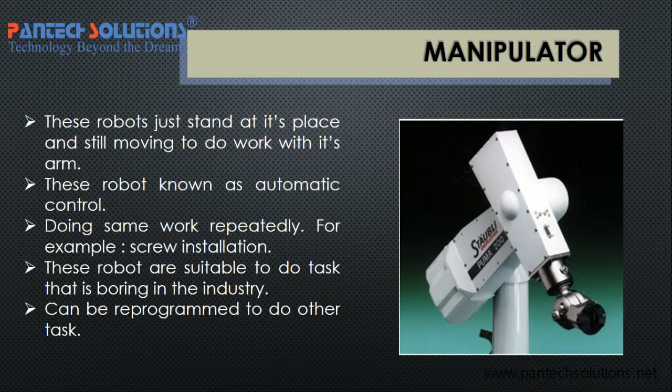Some examples of manipulator robots are forging robots, assembly installation, blocking rod for car park, and robotic arm. These can be said to be the major robotic applications, especially for manipulators.

Yeah, definitely it can be changed according to the user's task.

For example, here we have a number of applications, right? There are four applications: forging and assembly installation, blocking rod for car park, and robotic arm.

Among these, assembly installation is used for applications in car manufacturing or automobile industries. Blocking rod - whenever you go to a toll gate, a particular block is given automatically until you pay that amount. That is known as blocking rod.

Similarly, the robotic arm is very famous in DIY robots. This particular robot is used to lift and place, or to do applications similar to assembly installation, but its application can be changed as easily as possible.

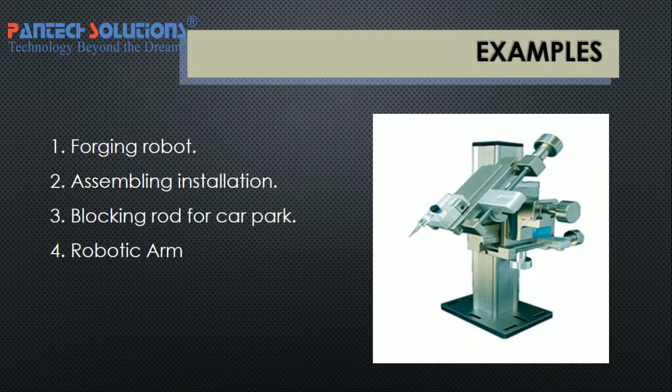Example of robotic arm. It is mostly used in industries just to lift heavy materials. This is also a standalone robot only. Let me show you this particular image. I hope you are able to see this particular image. So this is nothing but known as the robotic arm. That is robotic arm.

Okay, then let us move on towards mobile robots. Whenever you go towards mobile robots, it is completely used for just moving from one place to another place, such as legged robot or wheeled robot. Among these, wheeled robot is the most famous robot among these applications. This wheeled robot can be used in many household appliances like a vacuum cleaning robot with the help of remote control, either IR or RF.

Regarding a particular application, you will be able to just send the data, and after completing the cleaning sections, you can remove the dust bag from the robot, and it will also automatically go and sit within its particular place. Generally this kind of vacuum cleaning robot can be done with the help of lidar, IR sensors, and based on this tracking only it will be able to clean each and every place. It just does not look for the dust and all.

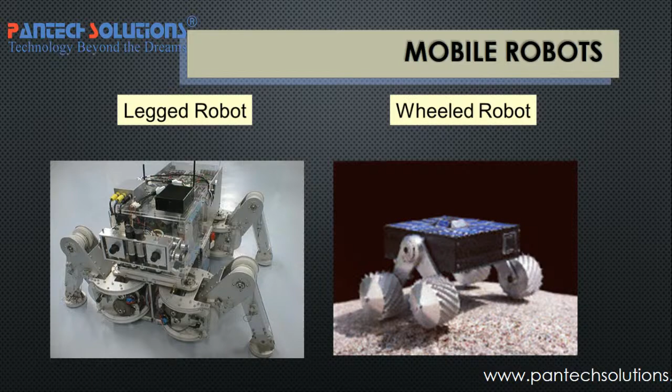So these are known as mobile robots, walking robots, and rolling robots. Whatever explanation was given is written in the form of points.

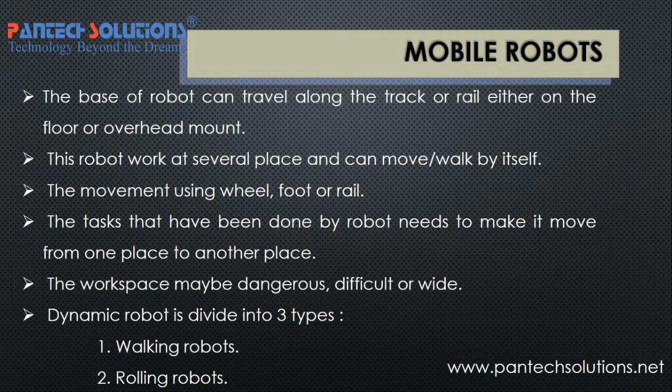So if we go for each and every robot, the components are manipulator, end effector, actuator, sensor, controller, processor, and software. The manipulator, end effector and these are mainly regarding the body structure, and according to the application or structure of the robot, it often changes.

This manipulator is known as the joining link of each and every part. The end effector changes according to the application, so each and every robot structure gets changed. For example, for laser painting or drilling robots, they will fix drilling motors or spray guns at the end, and similarly a welding robot will have a welding torch fixed at the end.

Actuators are the motors used to make the robot move in a swift manner, so it can be flexible on a 360-degree side and rotate in any way according to the requirement. Mostly they use stepper motors and servo motors only; DC motors are very rarely used for robotics.

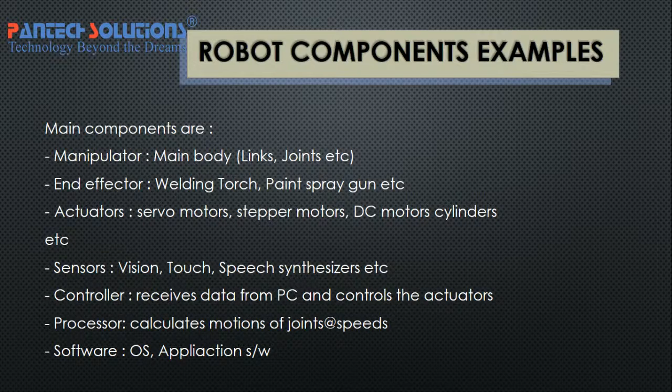So these are the most common sensors that can be used for a robot. Only the Mars rover robot sent to the Mars planet contains all these kinds of sensors, because it was sent to analyze the Mars environment. For that they require light, sound, heat, chemical, force, object proximity, physical orientation, magnetic and electric field, and resistance sensors.

No, DC motor and stepper motor are entirely different. The DC motor works only with the help of gears and coils, while the stepper motor works in a step by step angle manner. With this step by step angle, we can increase the speed, and at the same time acquire a heavy load.

If you compare the size of a DC motor and a stepper motor, both will be the same, but a DC motor won't be able to handle even 5 kilos of load, whereas a stepper motor and servo motor have the capacity to approach 5 kg, with a smaller size. Even power consumption is better compared to a DC motor.

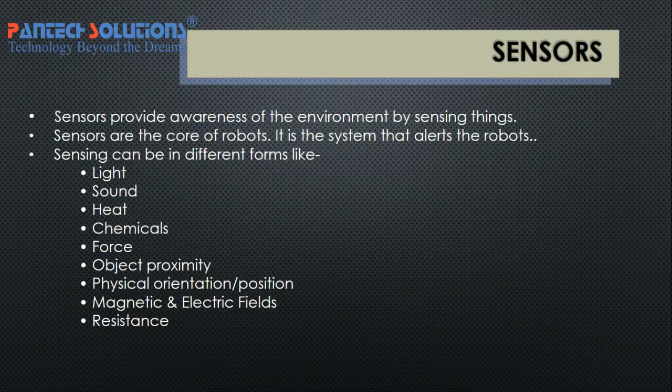So similarly, if you want to work with a particular motor as well as controller, definitely we require a motor driver. This is one of the best motor drivers we have used, known as L293D. Why we use a motor driver is because from the controller we only get 5 volts, so with 5 volts this motor won't be able to run at accurate speed. To increase the speed of the motor, we use this motor driver so that we can provide an external energizing supply.

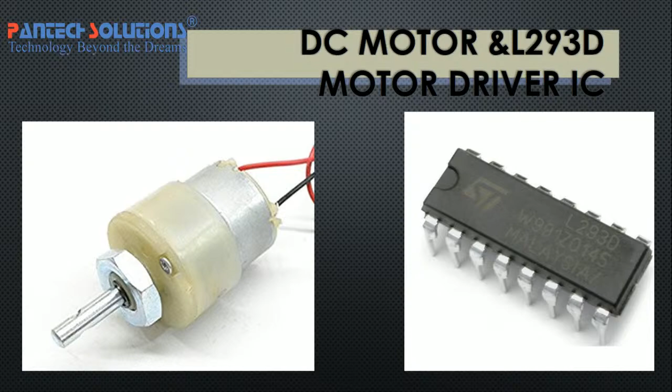So this is the configuration of the IC, and this IC is known as L293D. Similarly, we can use ULN2003 and L298 driver.

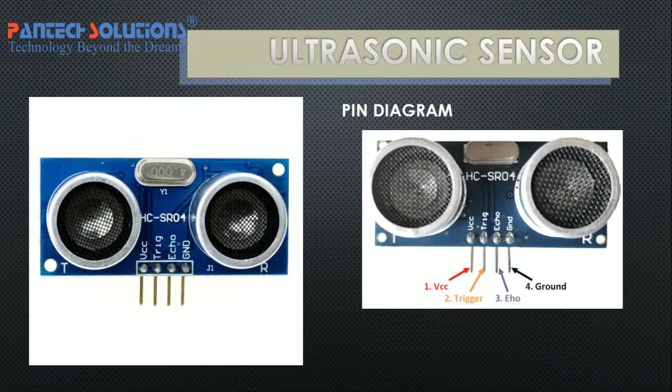So these are some of the basic embedded application robots, like obstacle avoiding robot. If in front of the particular sensor, by measuring the distance, it finds any obstacle over there, definitely it will be stopping, so therefore it won't be able to collide with the particular obstacle. This kind of application is mostly used in autonomous cars.

So the working of the ultrasonic sensor is that it has two parts, one is trigger and one is echo. The trigger will be emitting the ultrasound waves, and based on the emission, whenever it gets hit towards a particular obstacle, it will be able to receive the signal, and by receiving the signal only they will be able to calculate the distance.

For distance, mostly we use the same kind of formula, such as distance equal to time into speed. Based on that calculation only we will be measuring the distance, and we can also convert into centimeters. Normally the ultrasonic sensor, particularly this model HCSR04, will be able to measure nearly around 200 to 250 centimeters as accurate function. If you want to measure more than this range, you can go with LiDAR. With the help of LiDAR technology, it is also possible to measure the distance in meters, and at the same time it is also possible to measure in the form of mapping, 3D mapping can be done.

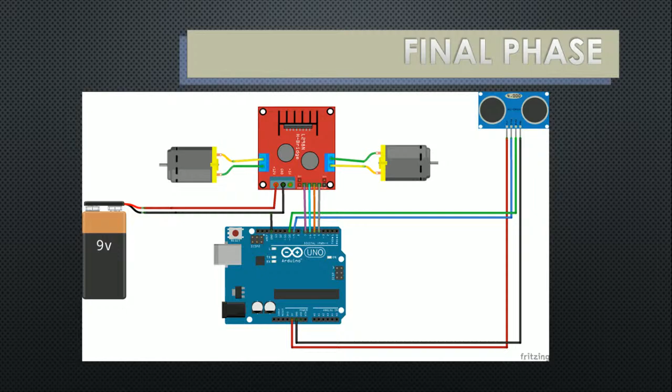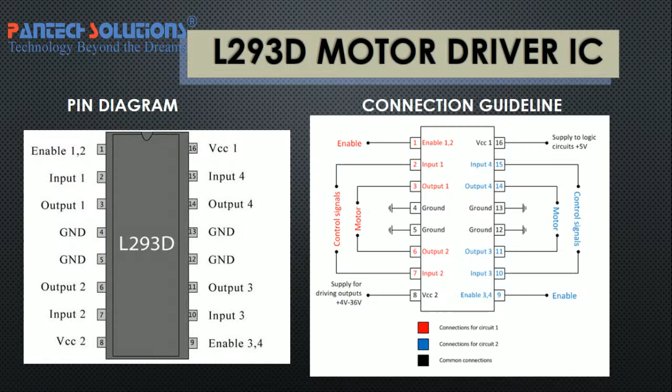So next is nothing but line following robot. This particular line following robot can be prepared with the help of a controller as well as without the help of a controller, but definitely we require that particular motor driver IC and IR sensor. This robot is meant just to follow the line, and these kinds of robots are used to transport some sort of heavy materials from one place to another place, so that they won't get deviated, and they will just be following this particular line. Similarly, for cleaning purposes also, some robots can be used to move within this particular line. This is mostly used in industries.

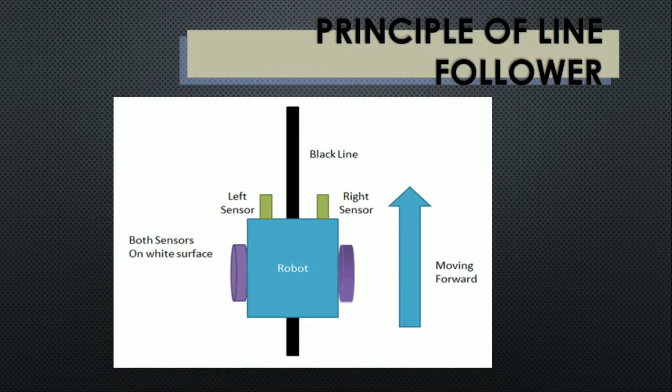I'm not sure who is the father of robotics, but the technology used in robotics is nothing but embedded combined with artificial intelligence. So in order to turn left and right for the line following robot, this is the particular application, they have two sensors over there, and based on the sensor's direction, the particular position will be changed.

Sensors can work in both analog as well as digital, especially this IR sensor. For line follower robot application, it is better to go with digital.

Ultrasonic waves are normally present in bats, blue whales, dolphins, whereas infrared provides infrared waves. The use of ultrasound waves is to detect obstacles only, it is also used in ships and submarines to detect obstacles under the particular object. Similarly, infrared is used to communicate between one system and another system, especially our TV remote, and infrared rays are also used to provide night vision cameras.

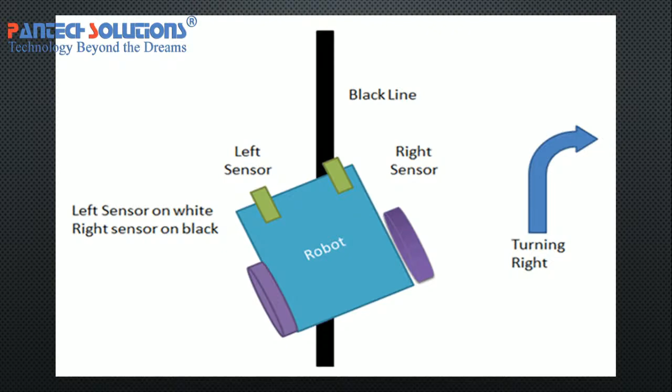So similarly, how to simulate this kind of huge robots? It can be done with the help of offline programming robot simulators. So all this kind of simulators can be applied over here. This is the software known as RoboDK.

So the version I am using is a free version, not free version, trial version. The paid version is a little bit costly.

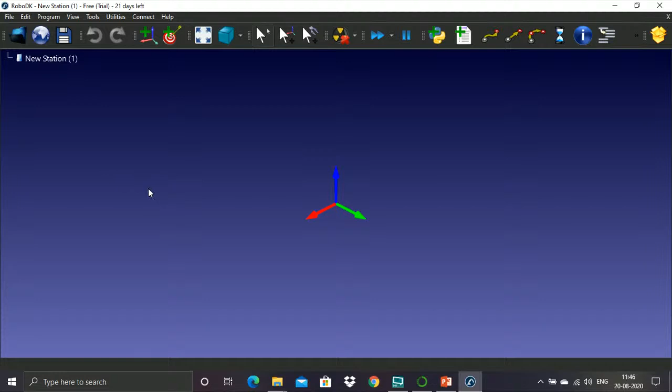With the help of this online library, we will be able to select the robot whichever we need. So these are all some of the small robots. The small robots, why I am saying in that sense, is not based on size but based on the payload. The maximum load of each and every robot can be done only with the help of 8 kgs and all, but the weight of the entire robot is 276 kg.

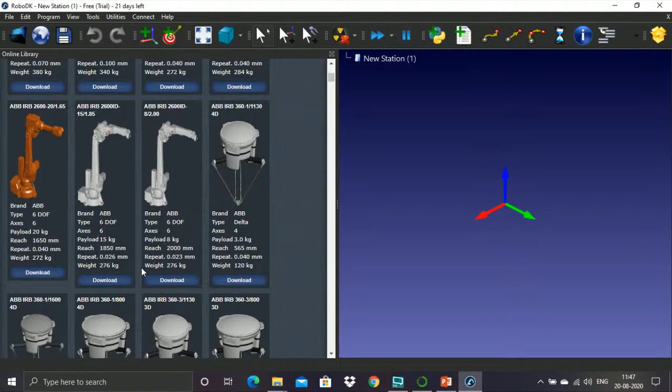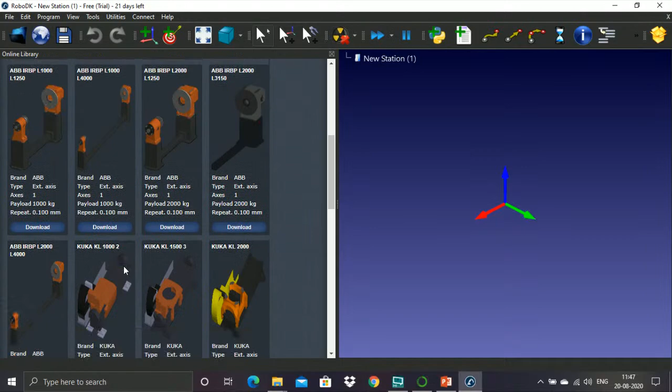We can filter it by payloads. Here I am giving the payloads as 800 kgs. So these are all the exact payload higher version robots, especially Fanuc, Kuka, ABB. Mostly Kuka only will be providing more than 1000 kg payload. So here we can download this particular robot towards our work area.

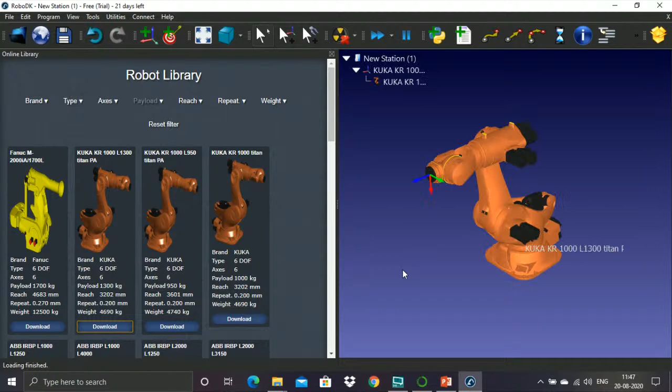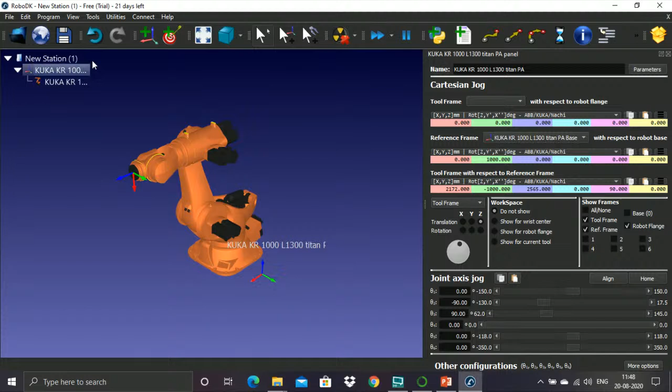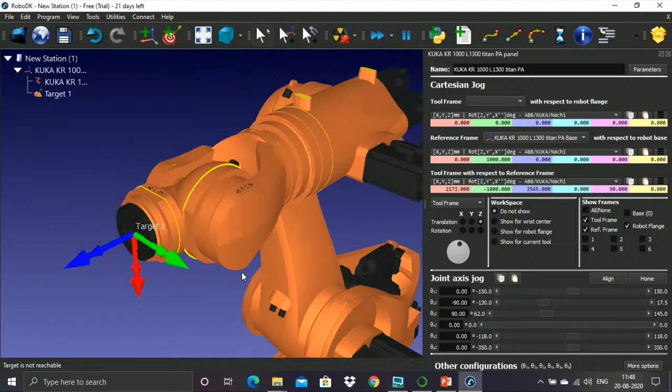It is being downloaded. So now you can see what is that particular function over here. Each and every part can be moved. This is nothing but the Cartesian jog, just for analyzing the x-axis and y-axis of each and every robot. So here you can see how the particular robot module is there. This is nothing but Kuka KR 1000 L 1300 Titan.

So this can be embedded with the help of Python coding. So here you can see that particular Python script that can be written over here. So whenever you download and install this particular software, you are able to function it. PID controllers, depending upon the application, they will be using it, not for all robots.

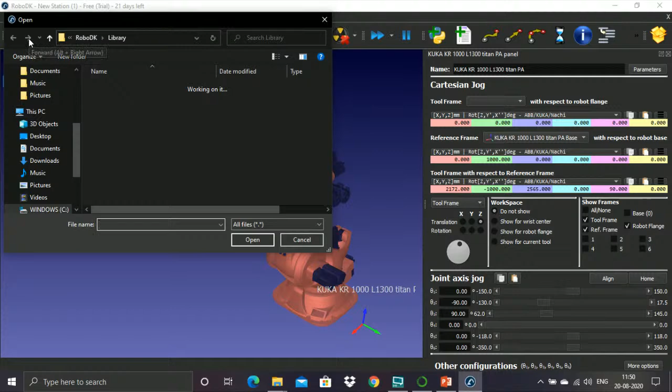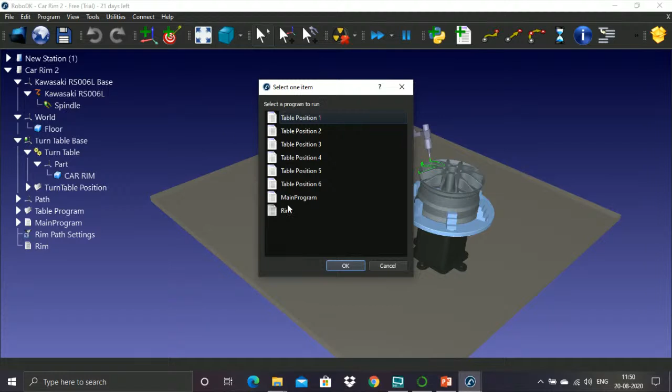Similarly, there are some examples for this kind of robots, like - so this is nothing but a car rim function. So here you can see how the car rim is being fixed over the particular robot. So it is carving that particular rim. So this is nothing but an example of a manipulator robot. Here this part is known as end effector.

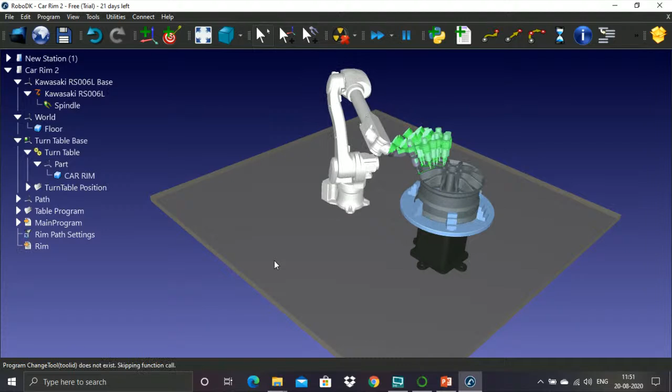ROS can be implemented only for lidar based autonomous robots, not for this kind of manipulator robots. CATIA software is used for 3D designing, whereas through that you won't be able to simulate any of the robots and all.

But this is nothing but RoboDK. Here it is particularly used for simulating this kind of robot. This is a very rare kind of application. Yeah, you can download it from the RoboDK website itself.

Simulating of mobile robot, it is not possible, because mobile robot prototypes can be easily made with the help of Arduino.

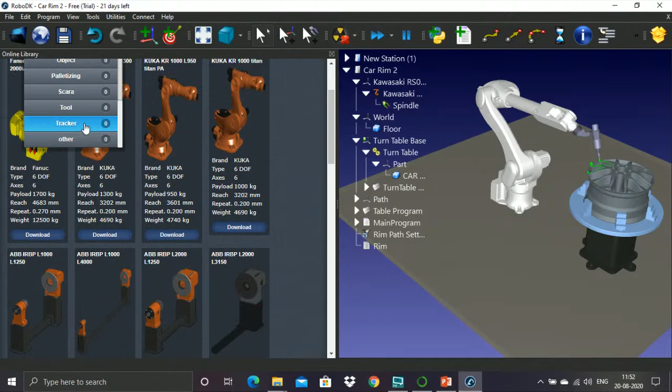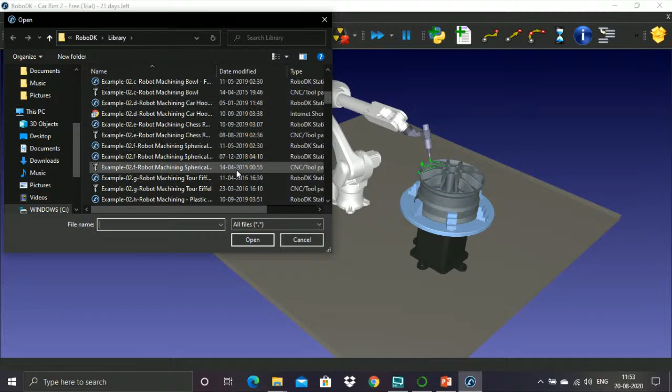So these are all some of the softwares regarding towards it. Similarly, there are many robots that can be prepared with this - wood engraving using robot.

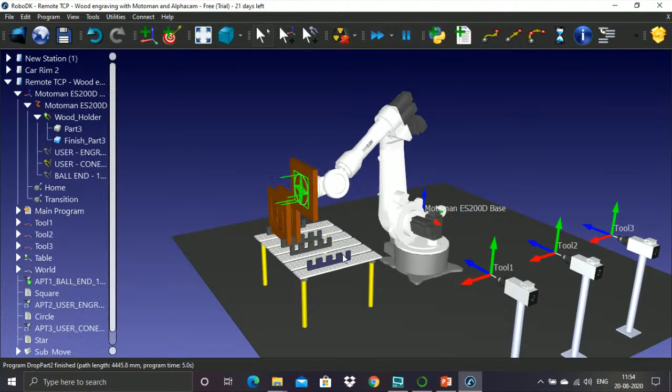Yeah, thanks for your valuable comments, sir.

The most difficulty in creating a robot is that you have to get the output whatever we have imagined or according to the target. If we didn't receive the output, then that's all - definitely we will get tensed over there.

How can you make this animated type of design? Definitely there will be courses regarding this. So according to the courses, there will be some diploma courses for designing robots and all. It can be applied.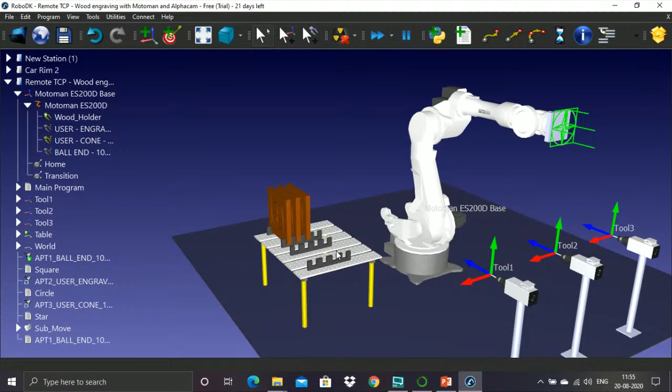So I hope now everyone has gotten some idea regarding the recent trend in robotics and functions. And within the next robotic application, I will try to show the Boston Dynamics if it's possible or if it is available. Mostly it is available. I will try to show you as soon as possible.